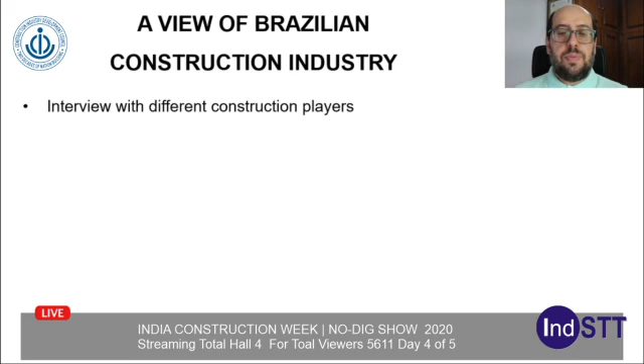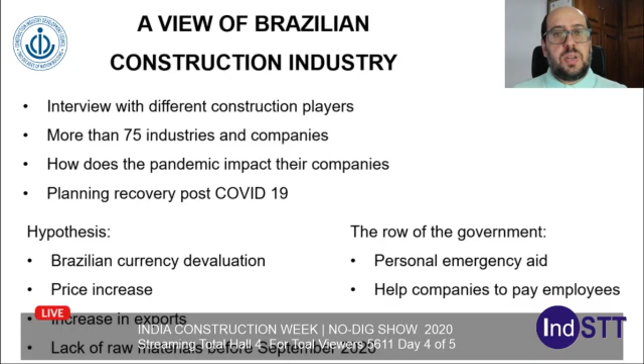So we interviewed different construction players, more than 75 industries and companies. How does the pandemic impact their companies and how are they planning to recover post-COVID? We started with some hypotheses: that Brazilian currency devaluation was making prices increase and increasing some exportation, and that there was a lack of raw materials before September 2020. We will see about it. And the role of the government, because they gave personal emergency aid and they helped a few companies to pay their employees.

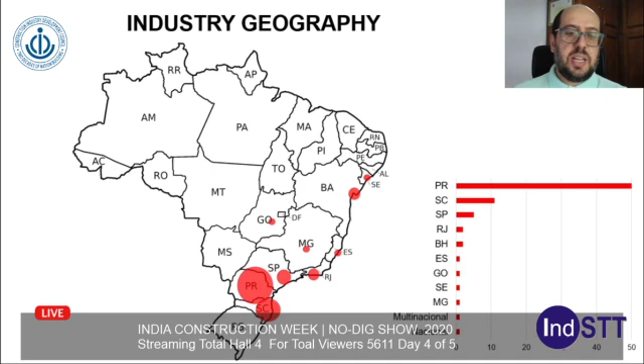So this is the geography of where we made our interviews. Because we are located here in South Brazil, in the state of Paraná, most of the companies we talked to were here in South Brazil. But we have a great number of companies here that could give us an idea of how COVID is impacting the construction industry. So most of them are in state capital cities. A few of them are small cities, smaller than 200,000 inhabitants, and the big cities are non-state capitals with more than 200,000 inhabitants.

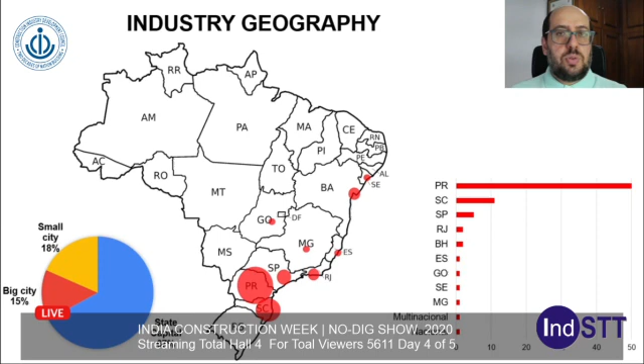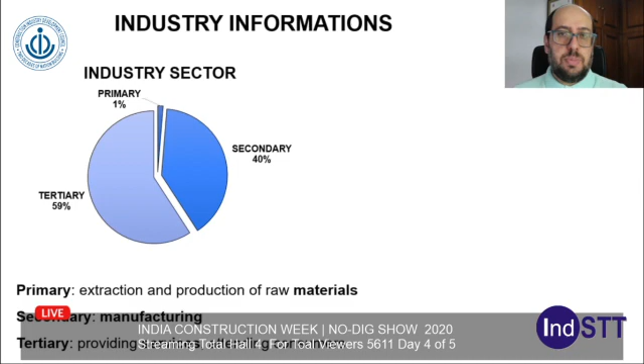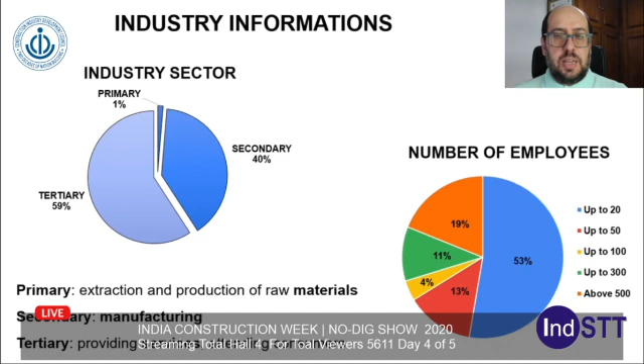So the industry information: the primary industry sector is those who extract and produce raw materials. The secondary is manufacturing. And the tertiary are those who provide services or attend consumers, like construction material markets, or those companies that work in the field, construction, building, houses, industries. So check the numbers of employees of the different companies we talked to. Most of them are small companies, less than 20 employees, but a few of them have more than 100 employees, as you can see.

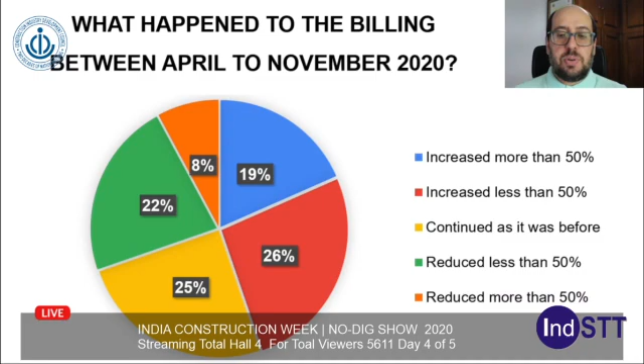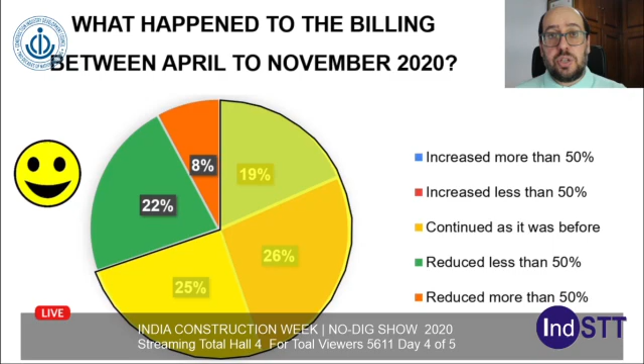So what happened to the billing, to the profit, between April and November? So 19% of them said that it increased more than 50%. A quarter increased less than 50%. Another quarter said it continued the same as it was before. And just 22% said that it reduced less than 50%. And just 8% said it reduced more than 50%. So check this out. 70% of the companies said that they have the same or better conditions. Why did this happen? This is the story I'm telling you today.

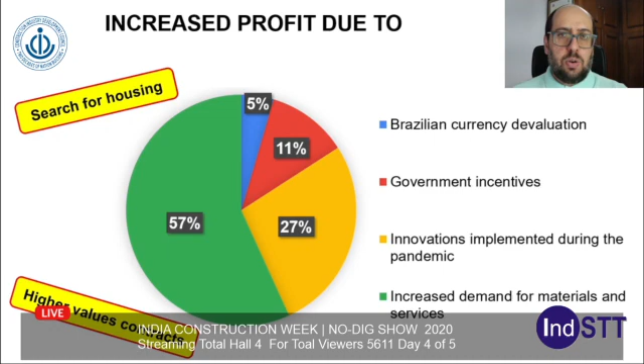So of those who increased profit, a few said it is due to the Brazilian currency devaluation because they export some materials. 11% of them because they were helped by government incentives. 27% of them created innovation implemented during the pandemic. So they faced a problem by innovating. And most of them said they increased profit due to the increase in demand for materials and services, because people are searching for housing and there are higher value contracts. Why are there high value contracts? We will see.

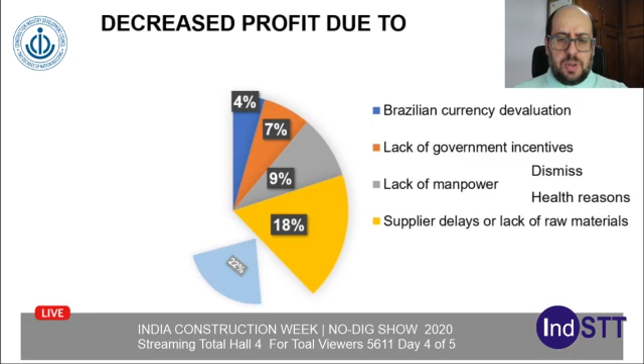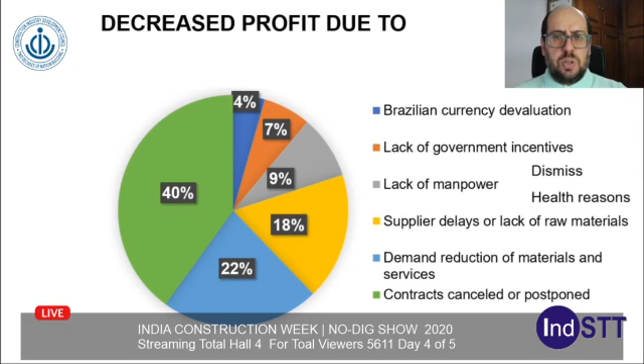So those companies said that they decreased profit. A small part of them is due to the Brazilian currency devaluation because they are importing expensive materials. 7% of them is lack of government incentives. 9% of them is lack of manpower, because they had to dismiss a few people or for health reasons these people are not working. 18% of them is due to supplier delays or lack of raw materials. Why? Because there is an increase in consumption that we will see in a bit. 20% of them said demand reduction of materials or services, and most of them said that they had contracts canceled or postponed. So these are the reasons why a few companies had decreased their billing.

About the lack of raw materials in the past 3 months, what happened? Well, it's delaying company activities and raising prices, which impacts the companies and the industries. But why? Because the stocks ran out. So this causes the delay. Besides, they have to renegotiate deadlines and they are searching for new materials. So those companies that are working with recycled materials are getting more money this year, even with the pandemic.

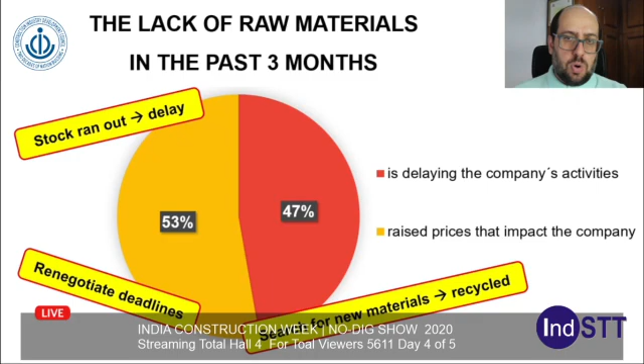Well, if raw materials are missing, what are the reasons for that? Part of this is because of the Brazilian currency devaluation. A few companies that work with steel or with aluminium or other polymers or other products are exporting more. It's more profitable for them to send these materials to China or the United States than to sell them to Brazilian commerce. Well, a third of them said that the primary sector industries reduced staff.

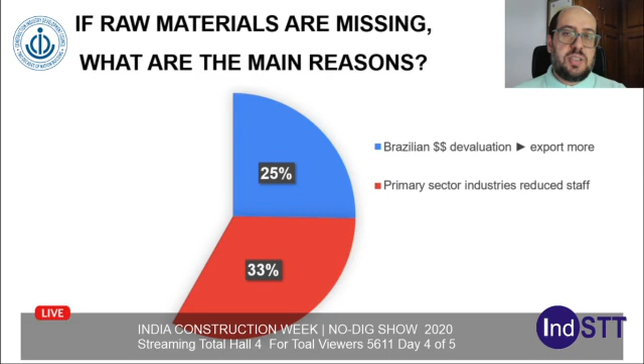This is a story I'll tell you at the end. 8% of them because of lack of government incentives. Almost 20% of them because of the consumption increase, and, as we just said, the stock running out is one of the reasons that raw materials are missing.

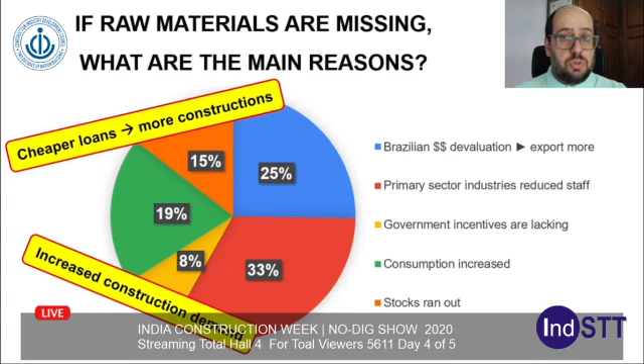So, in parallel, the economy in Brazil has cheaper loans, so we are doing more construction. So the construction demand increased. So we are constructing more, but we have less raw material. So this calculation will never fit. But okay, what to do to overcome the crisis generated by the pandemic?

If there are people earning more money, they have to make a solution. A few of them are cheering for government incentives. 15% of them are investing in training or in tools or equipment. A quarter is waiting for the vaccine. But check this out. Almost 30% are opening new work fronts, new fields, discovering new jobs. So check this out. Like two thirds of them are investing, discovering, trying to be creative to find a solution, not waiting for the government.

But what could the government do? A few companies said that they don't depend on the government, they work by themselves. 20% of them hope for valuing the Brazilian currency, so this equilibrium of selling raw materials outside or inside could be better. 24% of them hope for low interest on loans, so getting easier money from the government to support construction.

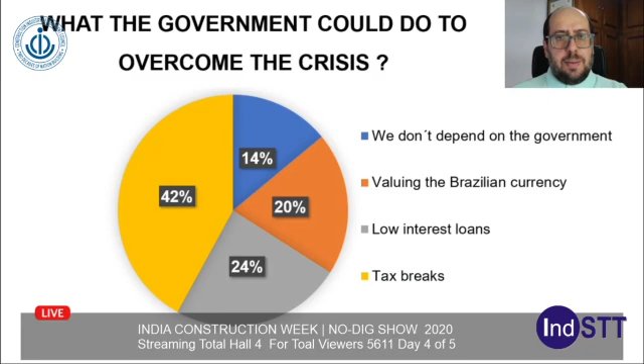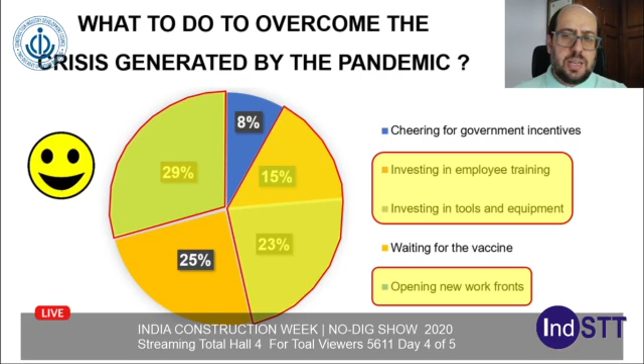And a big part of them wait for tax breaks because the Brazilian government puts a lot of taxes on civil construction. So just remembering that most of the companies that we interviewed are being creative, they are investing, they are trying to get better besides the government. The main remark is that the Brazilian government in March 2020, when the pandemic reached Brazil, considered civil construction an essential service. So what happened?

Most people went home for 2 weeks or 3 weeks, so the household reforms started to grow. Besides, there is more demand for housing, infrastructure, and I didn't write it here, but there is more demand for storage. Now we are buying, not in the shops, not in the markets, we are buying from our phones, from our television, from our computer. So we don't need to go to the stores as much as we used to. So there is a great increase in storage industries. This is the nice part.

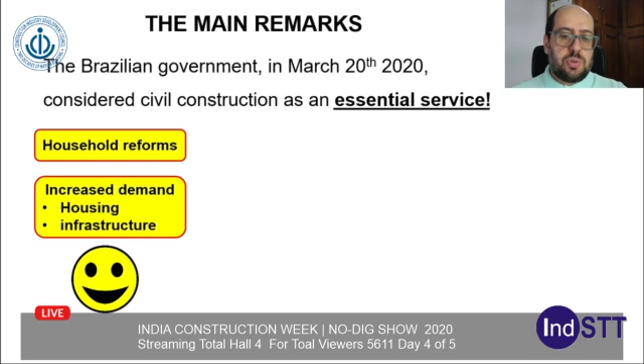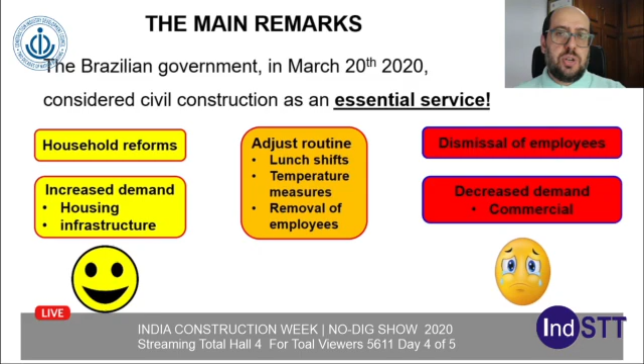In the middle, there are some adjustments in the routine. Lunch has to be made in shifts to avoid agglomeration of people during lunchtime, temperature measurement, removal of some employees that were suspected of COVID or got infected by COVID and had to stay at home for a few weeks. The bad part is the dismissal of employees and the decreased demand in the commercial industry. And in the middle, we can say that the Brazilian currency devaluation helped some companies that worked with exportation, but didn't help companies that imported raw materials.

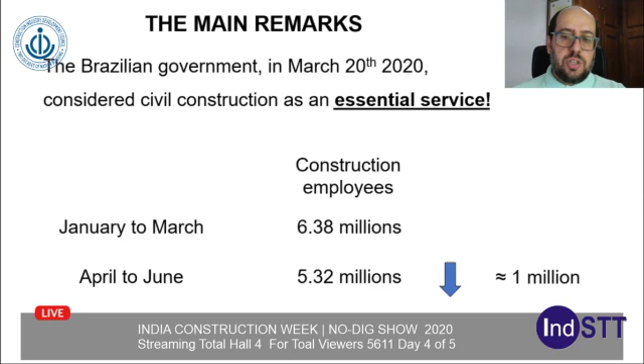So check these numbers. At the beginning of the year, we had 6.4 million people working in Brazil in civil construction. It's not a high number compared to you in India, but just to make a comparison with what happened the next months. So from April to June, when the pandemic reached Brazil, we lost 1 million people working in construction. And now we are getting better. We have recovered 0.4 million people working in construction. It's not the best. We are working little by little, but the main problem is the raw industries.

They stopped their services for 1, 2, or 3 weeks in March and April. When they restarted, they didn't restart at full potential. They were working at half capacity because they don't have all the employees, or they started to sell their stocks, and now that the stocks have run out, they have to produce the most their factories can, but they are not meeting all the demand. So there is a delay, there's an increase in prices.

So we have a nice part of the pandemic that increased some types of construction, but we have fewer people working there. Fewer people working, the production is not the same, but there is a demand for construction. So this is how Brazil is dealing with this, mainly because the Brazilian government considers civil construction an essential service.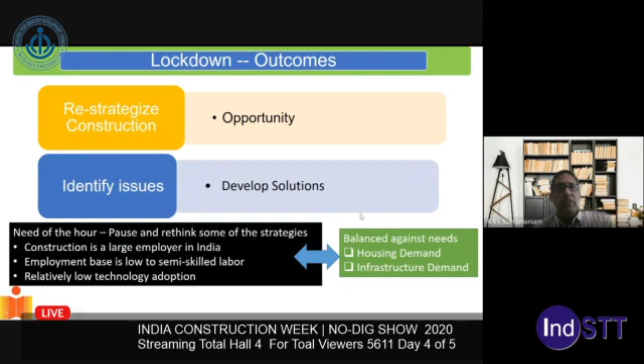Some of the solutions I'd like to throw out there, since we're talking about post-COVID recovery, is to talk about local utilization of material. We have a lot of material, and with advanced production we rely on supply chains, and often material is sourced from different places—production of something like cement takes place in a different location. We need to look at materials being used for products, and look at more local utilization of materials, so we can have a parallel system sustained by local development, which does not depend upon

the supply chains which bring in material from large distances. We need to look at employing labor locally. This whole problem of labor migration would mean that if we can create employment in construction locally—now, of course, the issue is that typically labor migrates from a rural setting to an urban setting, because most construction is in the urban setting. So how can we employ labor locally?

We need to look at production which supports construction—that's what we need to look at. So, more prefabricated products made with local materials, which can be done in a rural setting, so that these then serve to support construction in urban centers. We also have to look at efficient construction, reducing labor intensive processes at the site, supported by back-end production that can be done locally in the rural setting.

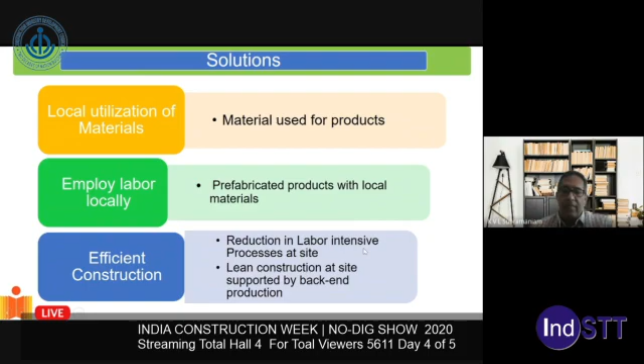So what I'm going to do now is present some of the opportunities and solutions—three specific things we have worked on which look at providing opportunities and solutions. The first is the use of excess fly ash locally in precast and prefabricated products to support construction infrastructure. I'll present this in more detail in the next few slides.

India produces more fly ash than it can consume, and most of it is not being done in urban centers, so we have this construction material which can be utilized locally to produce precast elements and structural elements. Rather than move the fly ash across the country, use it locally to produce these precast elements right next to where it's being produced, which is often in rural settings, and then those can be used to support construction happening in urban centers.

Then we're looking at local production of units using local materials, which provide a value add and employment. In specific, I'll talk about stone panel technology, which uses excess stones produced locally in one specific geographic location in the southern part of India, to produce precast floor panels.

These precast floor panels can be deployed very rapidly for providing flooring in urban construction, in precast construction. Then the last thing I'll touch upon briefly is rapid housing solutions, because we have a great demand for housing, and I'll present on the sandwich core technology, which can also be looked at for providing solutions for housing. Now, a quick background: cement, past, present, and future.

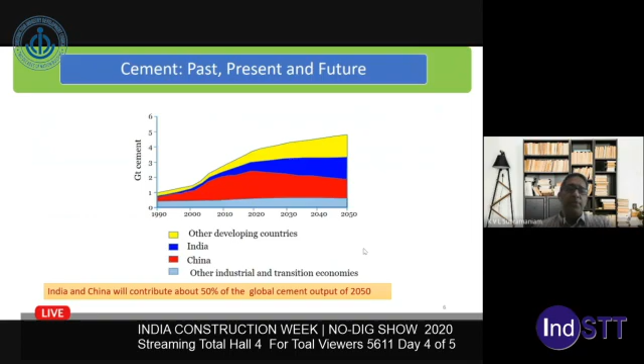India is currently the second largest producer of cement in the world, but our projected production in 2050, if we continue at the same trend, will make us the number one producer of cement in the world. Some challenges we currently face with cement production are that our limestone reserves are expected to last only 35 to 40 years. The energy requirement for cement is also quite large, and that has to be addressed, and the carbon footprint remains an issue.

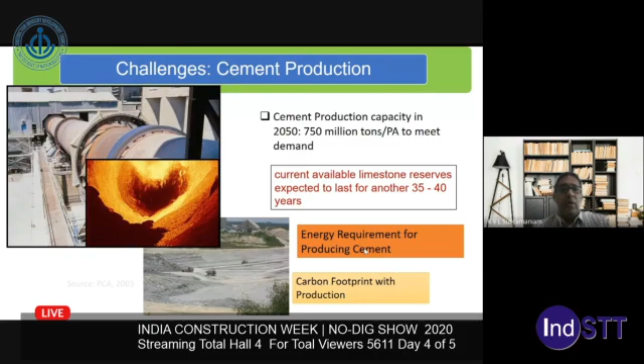India is actually right now the second largest producer of fly ash in the world. Our coal consumption in India currently is about 536 million tons per year, and it's only expected to rise because we are commissioning more coal burning thermal power plants. Our current dependence on coal burning for production of electricity is to the tune of 70 to 75%, which is bulk of our power production. Going forward, with an increase in power demand, we are going to rely more heavily on coal burning power plants, at least in the next decade.

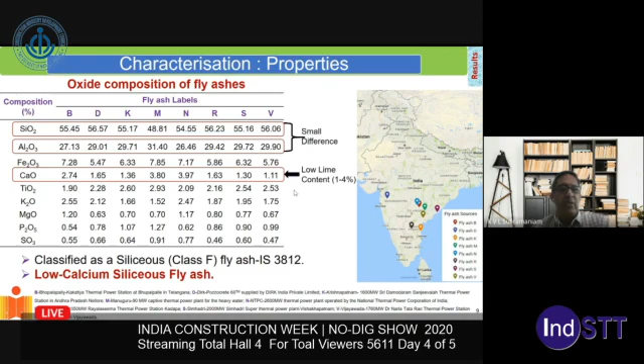The one unique thing about fly ash predominantly produced in India is that most of it has very low lime content -- very, very low. So most of it is class F fly ash. What we did, from characterization, is establish the reactive silica and reactive alumina in the fly ash. These are the two reactive elements in fly ash which are most beneficial for use in cementitious systems or in alternate binders being produced nowadays.

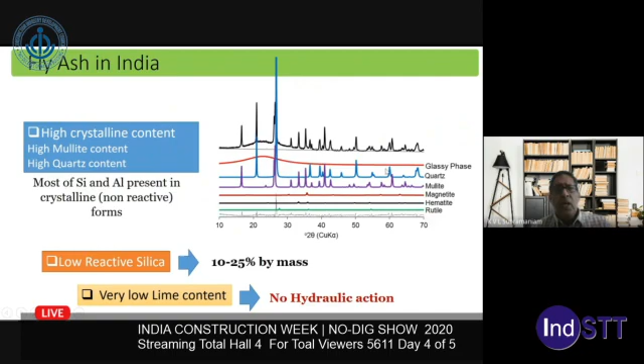So our next step was to look at the possibility of producing geopolymers with this fly ash. For geopolymer production from a given fly ash, it's the reactive silica and reactive alumina that are important. You take the fly ash, activate it in an alkaline solution containing dissolved silica, and subject it to elevated temperature curing. What you end up with is a geopolymer, basically a densely cross-linked network of silica and alumina. This geopolymer, produced from alkali activation of fly ash, particularly low calcium fly ash, tends to have much higher strength than cement. It's much more durable, and has very good fire resistance. So it's an ideal material for construction. The only problem is, of course, the temperature.

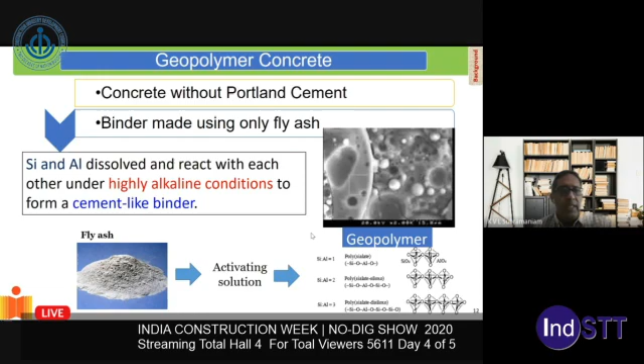So now, understanding the chemistry of the fly ash, we developed a process where, using this low reactive fly ash predominantly available in India, by optimizing the chemistry, determining the reactive oxide contents, and optimizing how much activators need to go in there—activators primarily provided in the form of sodium silicate and sodium hydroxide—and understanding the role of these in the entire reaction chemistry, we've been able to produce geopolymers which consistently give us strengths of about 80 megapascal. We've also reduced the temperature demand for curing down to 40 degrees Celsius, which is common in summers in India—about 6 months of the year, the high temperature in most of India exceeds 40 degrees. So we're able to achieve a binder that gives 80 megapascal strength using fly ash, a waste material, and this entire process has been developed by understanding the chemistry of the process.

Now, from there, we're able to come to a point where we can collect fly ash from different thermal power plants and optimize the activator for this, producing cements that give consistent strength and consistent properties. This is done following characterization of the fly ash obtained from these thermal power plants. This cement would basically produce a geopolymer that gives consistently high strength and high durability.

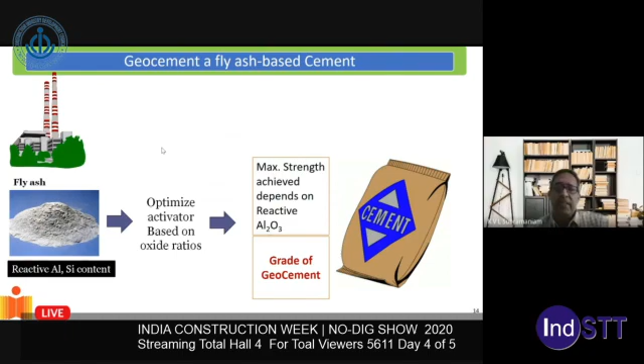So while we're looking for support, this fly ash is being produced across the country, mostly in rural settings. We're now looking to see if this material could be used to support infrastructure development. Steam curing can easily be adopted, and it's being done for producing a lot of construction-related products. In conventional steam curing, we raise the temperature to about 85 degrees Celsius, hold it there for 6, 8 to 10 hours, then cool down the product. This is the ideal temperature for geopolymerization to happen.

We can actually accelerate the geopolymerization and deliver the strength much quicker, as shown before. Because these geopolymers produced from fly ash have very high acid resistance, they're ideal candidates for making precast pipes, which can be used for sewage and even for transporting water in urban settings. Here's an idea of a precast product that can be made close to the thermal power plant and used to supply demand in urban centers, or the requirement for infrastructure in urban centers. The other thing is also tunnel liners.

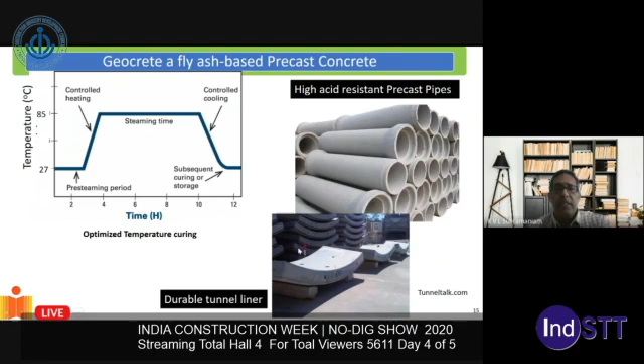These are tunnel liners that are used to stabilize tunnels, and these tunnel liners again can be quickly made out of these geopolymers and can be used to support the infrastructure development.

Now, another product that we're working on very closely with this fly ash is developing cellular masonry blocks, which basically provide enhanced building envelope performance. Now, India is a hot tropical country, and for us, it is important that we keep the heat out of our houses. Now, most of the heat gains into our house happen through the walls, and basically, whatever we can do to reduce the heat gain into the house would essentially involve trying to develop walls which have

low thermal conductivity. And basically, what we are interested in is developing these bricks, and these bricks are used as infills inside a reinforced concrete frame. And basically, they are the outer envelope. This is the outer envelope of the building, which is exposed to the outer environment. Now, these bricks are currently made of what is known as autoclaved aerated concrete blocks, which have a low thermal conductivity, but they're made of cement.

And I'm showing you the process of the autoclaved aerated concrete blocks, where air is entrained in the cement-based matrix in the form of tiny bubbles, and the entire cement block is autoclaved, and what comes out of it is the autoclaved aerated concrete block. This AAC block is then used in making masonry, which basically makes the infills between the reinforced concrete frames.

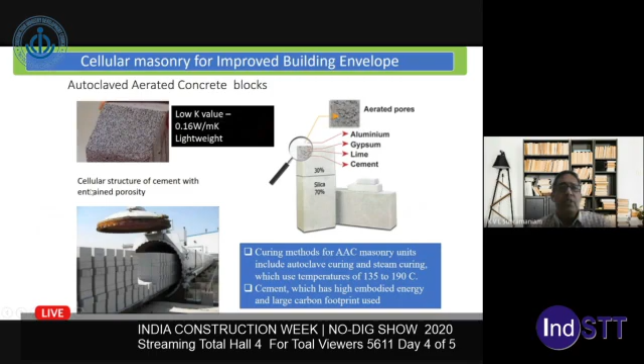Now, what we are proposing is to use the same process of autoclaving that is used for cement-based blocks, but instead use geopolymer-based blocks. So we can use this fly ash, which is alkali activated, with the optimized binders, which delivers this high strength. We entrain it with this porosity in the form of tiny bubbles. We autoclave them, and we can produce masonry blocks. And we are even thinking of making these wall panels.

Now, these are wall panels which basically can be used as infills, and this is technology that can readily be developed close to the production of the fly ash itself. And this again would employ a lot of labor close to where the production of these panels takes place, and can be used to supply the demand in these cities for infills in construction.

So these are a few of those things we are planning with the fly ash, which basically decentralizes the production, takes the production closer to where the fly ash is being produced, and generates employment in construction-related activity close to where the fly ash is being generated.

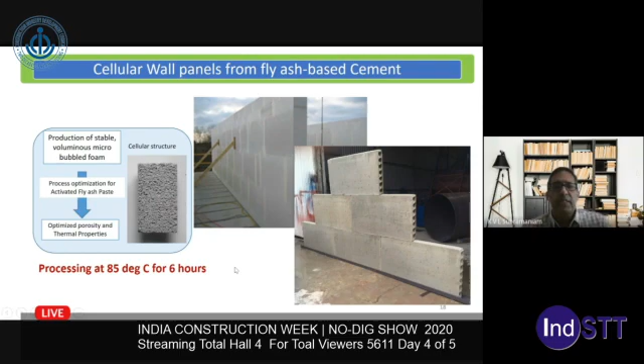Now, of the other two things I wanted to talk about, one is the use of local materials for construction. Here is a specific example of what we worked on with local materials. One of the common things that's found across India are stones. Stones are abundant in India, and stones from specific regions like Tandur, Kota, Makrana are world famous for their quality, and have been used traditionally for different forms of construction.

Now, during the production of these tiles, which are used in construction as floor tiles, or sometimes even wall tiles, a lot of waste is produced. So we were looking at developing solutions to use up this waste, and also to deliver a precast construction product, which could then be used to support construction. So we came up with this innovative, eco-friendly precast natural stone composite floor system.

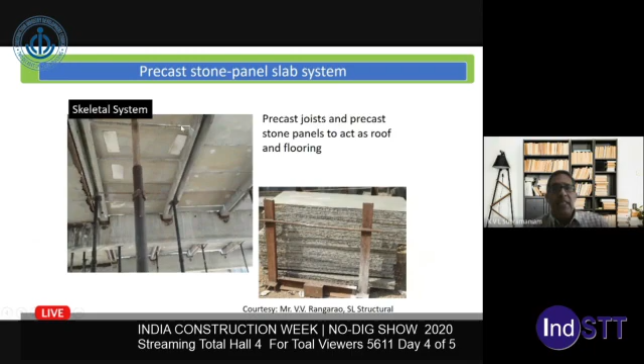And these precast floor joists can then be used directly to assemble the flooring system at a very rapid pace in a totally precast manner. And this is the assembled floor where all the slabs have been assembled.

They're simply leveled, and you have a very quick flooring system that is developed by using these stone panels, which are produced in one of these rural pockets in India. So the whole point is to set up this precasting unit, which would produce these precast wall panels and even precast slab panels, which could then be used in urban centers to meet the requirement of flooring

and for use as wall panels. Now, one of the advantages of these floor panels as they're used is that because the top surface is a stone and it can be polished, one does not need to provide any finish to it. So the natural surface of the stone can be used as the finished surface. So thereby we also save material in the whole process. So the stone is acting as a structural material in this precast panel, and it also provides the finished surface

after construction. So again, the production of these precast panels is being done in this rural part in Tandur, and the finished floor panels are shipped to the city. And one example here is where they were shipped to Hyderabad, which is a city, and used for construction in Hyderabad. So we are able to generate employment in the rural sector where the labor had migrated to, and at the same time keep the construction site in the urban center clean by adopting precast technology. So it's a leaner construction site in the urban setting.

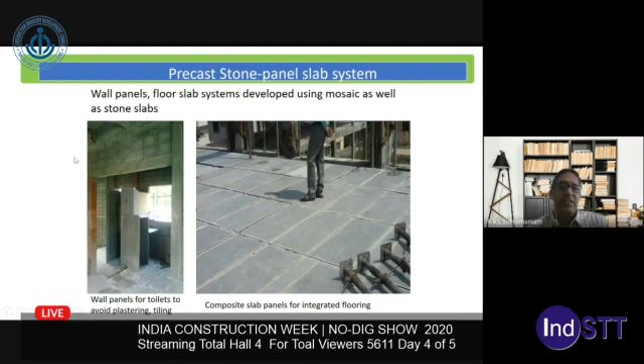So just to show you some photographs of this integrated precast beam column system with the slab wall with the stone panel system that was used as floors. Now, the final thing I want to talk about is the 3D reinforced system for walls and slabs. Now, this is the wall panel system and even a slab system that has been developed, where basically we have 3D integrated wire mesh, which has a core which is made of expanded polystyrene (EPS).

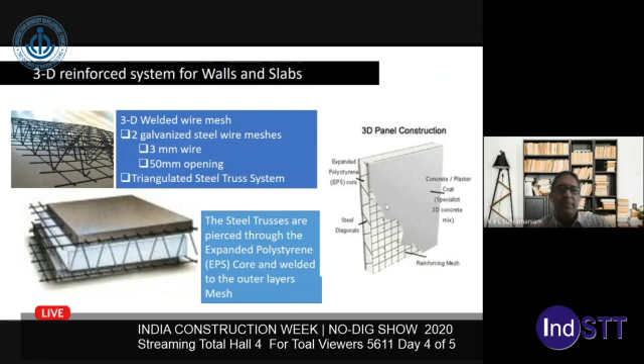Now, what is done is that layers of concrete are basically cast on both sides of this EPS core, and we have wire mesh reinforcement on both sides, which serves as the reinforcement to these concrete layers. So this integrated 3D wire mesh reinforcement of the EPS core is basically then assembled in the form of walls or slabs, and simply by concreting the two layers of concrete, the entire structure can be built. Now, this is basically being used a lot for prefabricated low-cost housing.

The sandwich core technology has the advantage that because it has an EPS core, which has a very low thermal conductivity, it provides a very high thermal comfort. Now, of course, the limitation currently is that it's limited to small spans and simple structures. So it is ideally suited for modular construction. And it is a great potential solution to the housing problem in India, where we have a great demand for housing, both in the urban and in the rural sectors.

So what is the advantage of this particular 3D reinforced EPS sandwich core technology? First is we can use local masons. So this labor that has migrated from the cities to the rural areas can be employed to make these panels. And these panels could also be used as precast panels for use in construction. So the production of the panel itself takes place wherever the labor is or wherever they have moved to. It, of course, provides very rapid construction. It has high thermal comfort. And overall, it's a lightweight construction. So there's saving in materials.

So these are the three India-specific potential solutions that I wanted to present for this post-COVID disruption. And the major disruption had to do with the migration of labor, where the labor moved from urban centers back to rural areas, and basically trying to clean up the construction space so that we make the construction space in the urban settings more efficient, with leaner construction, with lesser labor, but at the same time keep the employment in the rural sector by providing opportunities there, where support structures can be made there, shipped from the rural to the urban centers, and used for construction there.

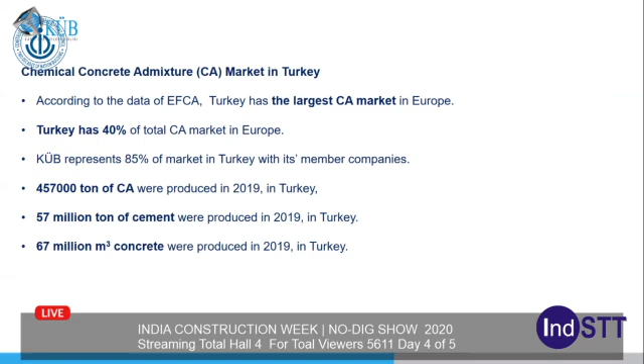When we look at the last year's numbers, last year's data, 457,000 tons of concrete admixture were produced in 2019 in Turkey, which is really huge. And when we look at the cement and concrete volume, 57 million tons of cement were produced in 2019 in Turkey, and also 67 million cubic meter concrete were produced last year in Turkey. And these numbers are really huge when you consider a European market.

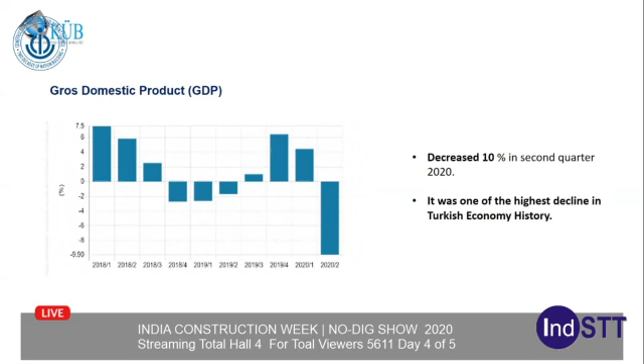And next one, you know, we are following EN standards for concrete admixtures, and the EN 934 standard is very important for us, and we are following that standard. And according to that standard, there are different kinds of groups in concrete admixtures, and there are classifications. So one of the classifications in that standard is water reducer and plasticizer, which is one of the important groups.

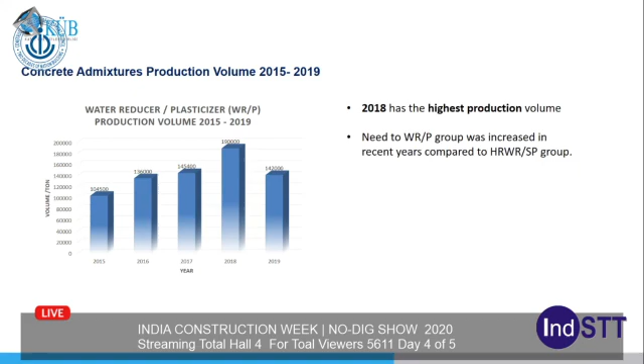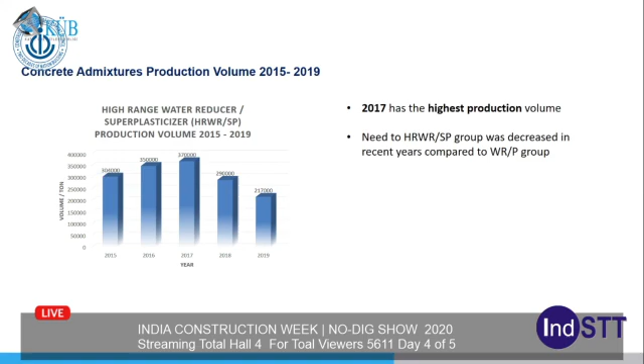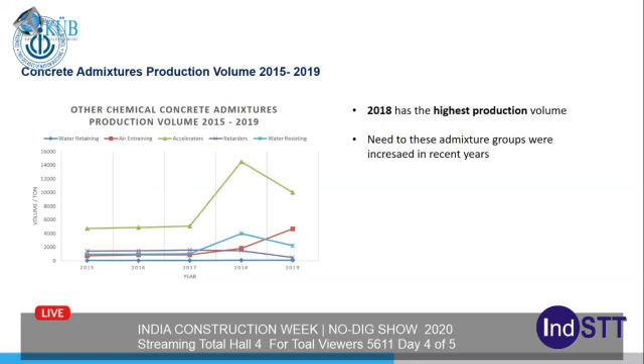And coming to the conclusion, Turkey has the largest production volume in Europe, and within the last 5 years, the year of highest production amount was 2017, and the lowest was 2019. But despite this lowest production amount, Turkey still has the largest production volume in Europe. And the high range water reducer superplasticizer admixture group was always produced much more than the water reducer admixture group each year. The gap started to decrease in the last 2 years, but high range water reducers were always higher than the water reducer groups.

Until 2019, production volume of shotcrete admixtures increased each year, and in 2019 it decreased, but as I told, the decrease is not the same as the other groups. So again, this is one of the good admixture groups. While the other chemical concrete admixtures were increasing in small amounts between 2015 and 2017, the accelerated increase reached its peak in 2018, the year of highest production in terms of quantity. So lastly, after all this data, Turkey is in an advanced position of know-how, production, and application technology in terms of chemical concrete admixtures.

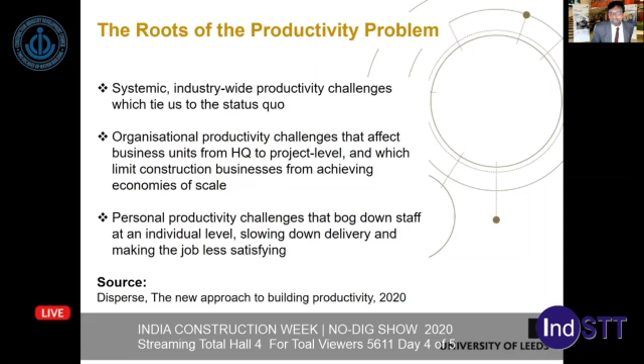And what are the roots of the productivity problem? According to a Disperse, a company which is now focusing on improving productivity, it is systemic industry-wide productivity challenges which ties to the status quo, organizational productivity challenges that affect business units from headquarters to project level, and which limit construction businesses from achieving economies of scale. And finally, personal productivity challenges that bog down staff at an individual level, slowing down delivery and making the job less satisfying.

What did COVID-19 do to the construction industry? Initially, there was the loss in construction activities due to the stoppage of all construction activities. And slowly, it was realized that there is the need to revive the construction industry because investing in infrastructure projects would help to re-engage the construction workforce and drive the economy forward. So currently, many countries are at a phase of investing in infrastructure projects to kickstart the economic growth.

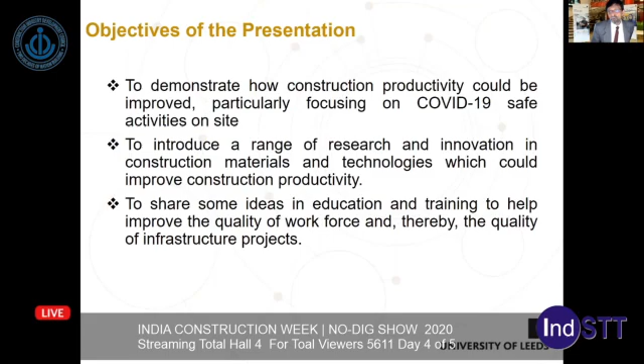So the objectives of my presentation today are to demonstrate how construction productivity could be improved, particularly focusing on COVID-19 safe activities on site, to introduce a range of research and innovation in construction materials and technologies which could improve construction productivity, and to share some ideas in education and training to help improve the quality of workforce and thereby the quality of the infrastructure projects.

So let me give you a summary of building productivity through technological innovations. And first, precasting and 3D printing. These are two examples from India where precast concreting is used to construct residential houses. The first example is from Uttar Pradesh and the second one is from Kerala.

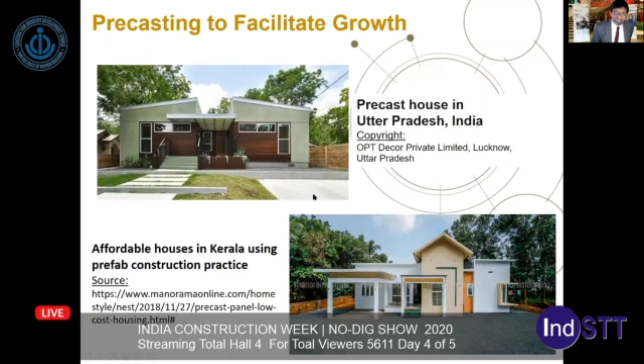In both cases, the facilitating factors are the fact that we have high strength, high performance concrete now available. The admixture technologies would facilitate the construction of prefabs. Advances in fiber reinforced concrete and pre-stressed concrete would enable this. And there is improved understanding in structural connections to facilitate the connection of structural prefabricated units. And of course, there is the improvement in construction workforce that would be required for this type of work.

So the change from the cost of construction at the beginning to whole life cost and life cycle analysis also helped in going for precast concrete manufacturing. And people are now aware of or concerned for sustainability, and that also is driving this.

Another area is the Flexi-Arch. It is used for small to medium span bridges. It's an example from Northern Ireland. You can see from here the flat pack precast units are brought in, lifted, placed in to form the arch, and then tied together to get the bridge needed. It is patented and of course, promoted through a precast concrete industry in Northern Ireland called Macrete.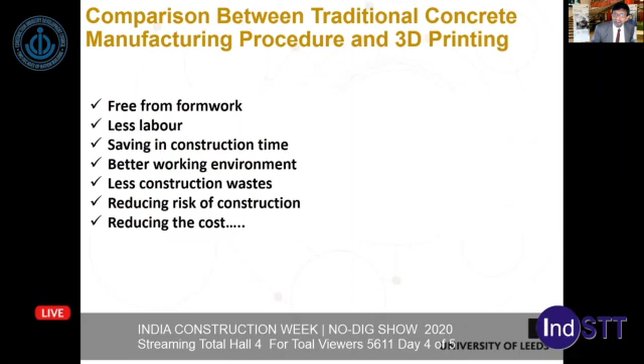It is becoming an attractive concrete technology, and the reasons are: there is no need to use formwork, less labor used, there is a saving in construction time, better working environment, less construction waste, reduces the risk in construction, and it reduces the overall cost. All of these would facilitate 3D printing becoming a technology for the near future.

You can see the world's largest 3D printed building in Dubai in 2019. It's a two-storied 3D printed building constructed by a US-based company. It used local materials and is efficient in insulation, hence reduces the energy consumption.

What are the facilitating factors for going for this 3D printing technology? One is the advances in material technologies. The second is the advances made in building information models, construction robotics, artificial intelligence, and construction informatics.

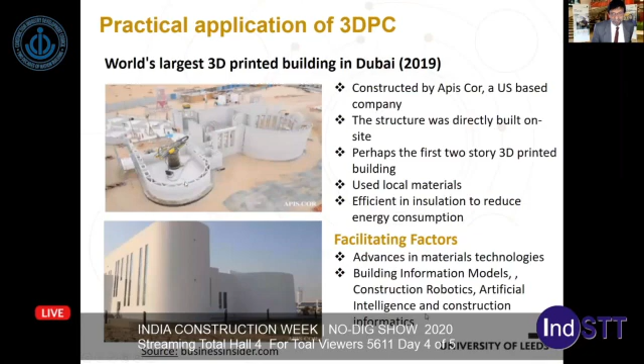So just wanted to have a brief chat about construction robotics, artificial intelligence, and construction informatics. Construction robotics would become the new normal because, with advances in technology, robotic technologies are widely used to achieve greater efficiency in the performance of construction tasks and also to improve working conditions in the construction phase.

The market drivers are a high level of construction growth expansion activities, unsafe environment which would result in injuries to labor, and, like what we have faced recently, any pandemic could bring in uncertainties.

It can be used for different construction activities such as structural demolition, bricklaying, assembling prefabricated components, welding, construction of roads, unlocking different advanced design possibilities, and carrying out aerial surveys of structures. For different applications, construction robotics could be used.

Here is another example where an image-based system is used for advancing the technology. This is called a virtual sieve. Instead of using a physical sieve, an image-based system can be used for characterization of sand, gravel, and concrete.

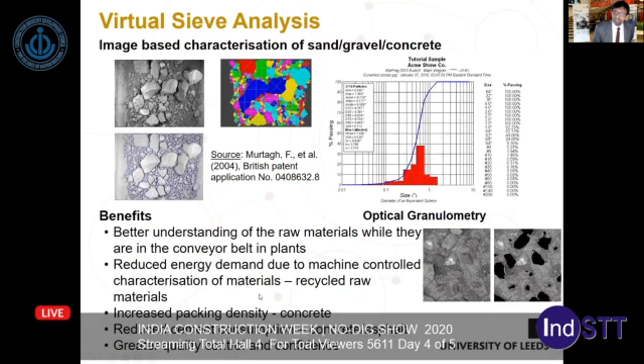Another example of the use of image-based systems is the virtual reality assessment of roads. This is another example from Northern Ireland. The Amey Roads Northern Ireland used laser scanning technology for scanning the bridges. You can see the bridge on the left-hand side and the scan image on the right-hand side.

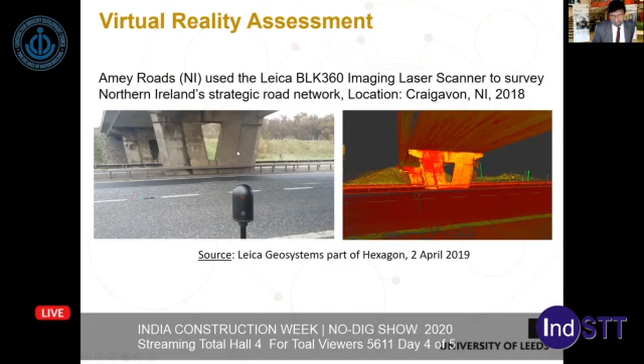And talking about image-based technology, here is another case: a cliff edge in Northern Ireland. This work was done by Aimee McCabe from Queen's University. You can see on the left-hand side, it's 60 meters high. The boulder field is inaccessible for doing any surveying.

So you can use drones to survey and capture the image, and photogrammetric models can be built from which you can get really, really accurate measurements of the boulder on the slope.

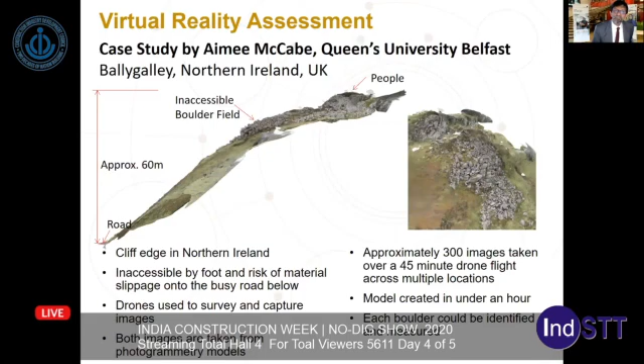A brief mention about structural health monitoring and whole life management. The rationale for structural health monitoring can be seen from this slide. The blue line here is where the construction at the inception, the initial stage itself, is of top quality, and slowly the performance deteriorates, but it will never go below the minimum acceptable level.

Such a system is possibly used for nuclear containment structures. However, the cost associated with this could be really, really huge. If, on the other hand, you try to save the cost and compromise the quality at the beginning, you can get complete failure, which means there has to be complete reinvestment in the structure, which would cause a huge amount of money to the industry.

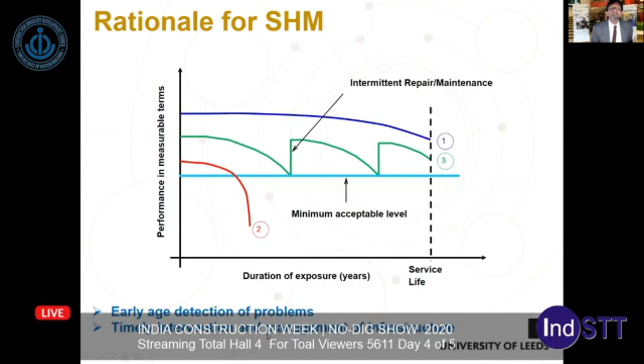And how do we get this information, how far it has deteriorated? That information can come from either periodic inspection or putting structural health monitoring systems in place. This means for early age detection of problems as well as timely intervention and management of infrastructure, structural health monitoring systems can be used.

Two examples I want to share with you. This is the Hangzhou Bay Bridge in China.

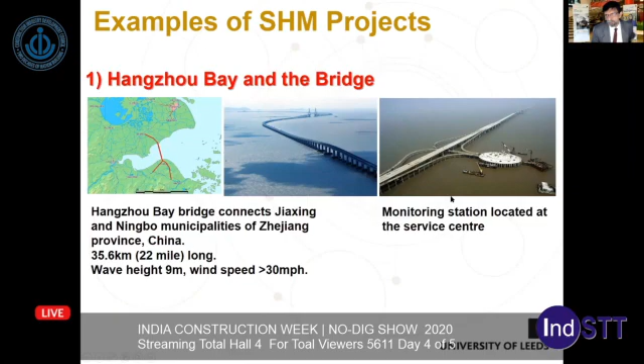It's work done in partnership with Zhejiang University in China, on a bridge 35.6 kilometers long in very aggressive conditions, for example wave height of 9 meters and wind speed more than 30 miles per hour. We have a service center somewhere in the middle of the bridge, and that's where we located our monitoring station.

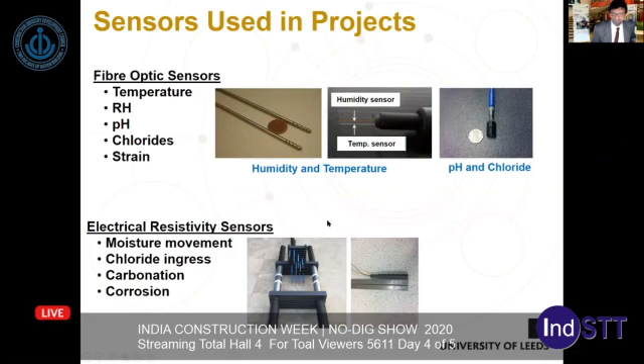Electrical resistivity sensors can be used for moisture movement, chloride ingress, carbonation, and corrosion, and these are sensors developed in partnership with Professor John McCarter at Heriot-Watt University, Edinburgh.

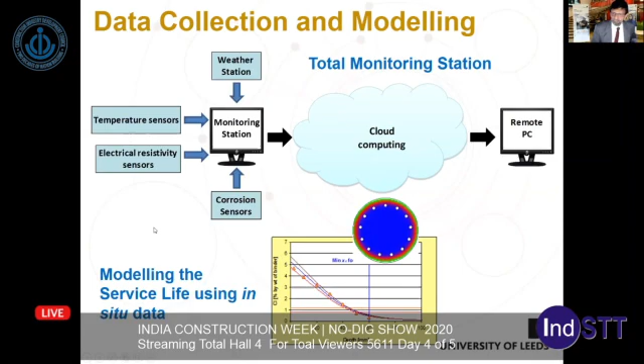So we can have the monitoring stations connecting to a remote PC using cloud computing. We get the data, and that data can be used for service life prediction. Depending on how the structure is behaving, intervention strategies can be brought into practice.

The next topic is building productivity through education and training. The University of Leeds signed a partnership agreement with the Institute of Concrete Technology to offer advanced concrete technology training for graduates. At the end of that, they get either a PG diploma or an MSc degree, and then they can gain MICT, the membership grade of the Institute of Concrete Technology.

There are three routes to admission. One is the normal degree route for the MSc, but there are two other routes that would be really interesting for people working in industry. One is called the experiential route: say somebody worked in industry for 20 years, with the last 5 years at managerial level. That experiential training can be written up in 1,500 words, and we assess it independently using two assessors, and then admission to the degree is provided.

The second route is the accredited certificate training. That is, if somebody did a number of CPD trainings and accumulated sufficient training, that can also be used for admission. So there are three routes in total for admission.

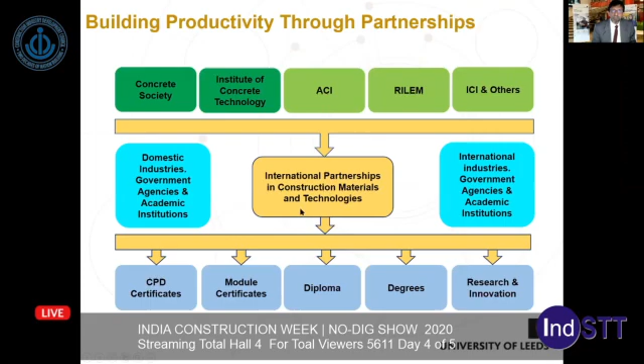We can work with both domestic and international industries, government agencies, and academic institutions. This international partnership in construction materials and technologies can result in CPD certificates, module certificates, diplomas, degrees, and research and innovation, which will drive more technological advancement that is accepted in the industry, thereby improving productivity. So educating the workforce, as well as putting research and innovation into practice through international partnership, would help in building productivity.

To do that, we need continuous funding from both government and industry. We need strategic partnerships, such as with high technology companies, IT industries, and R&D institutions. We need global partnerships so that pandemics of the type we faced can be addressed, and we can ensure social and economic development in countries.